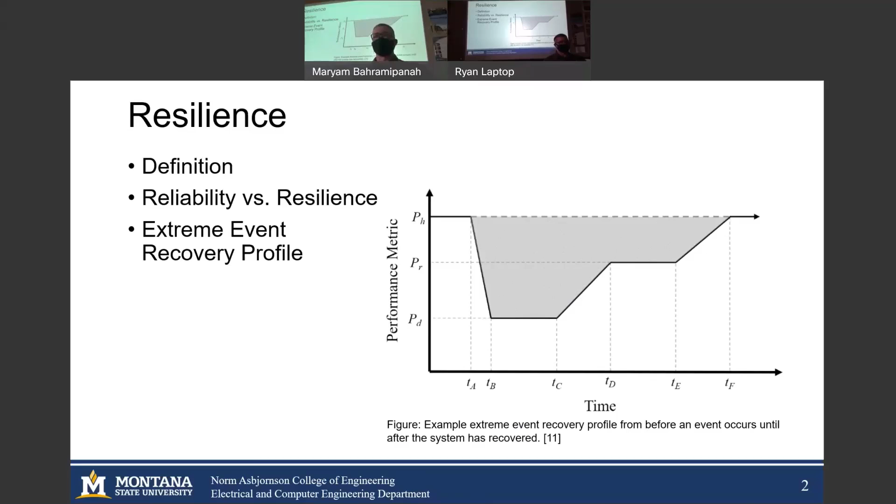As I go through my presentation, keep in mind this image, which is a profile of an extreme event: going from before the extreme event occurs, where the system operates at a healthy performance level; after the extreme event occurs, the system degrades down to a degraded performance level before recovering over time back to healthy performance, after resources available to the recovery process have been assessed and a strategy has been developed.

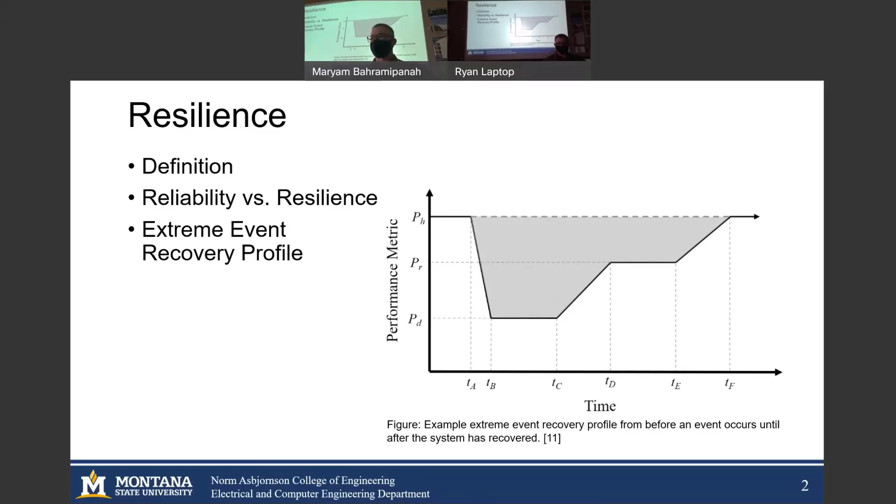The motivations behind this research are mostly based on the increased frequency and severity of extreme events that have occurred in recent years. Main ones that come to mind, as I'm sure we all remember, are the polar vortex, which caused extreme load curtailment this past winter over in Texas, wildfires in California that have happened almost annually for the past 5 years, as well as hurricanes across the eastern US that occur almost annually as well.

The research gap this is trying to fill is developing a probabilistic approach to extreme event system degradation, where many works otherwise assume that a level of system degradation has occurred before evaluating a system's recovery and the performance during that recovery. It's also trying to develop a generalization of equipment impact techniques for any extreme event.

Other works tend to perform single, highly focused event simulations or analysis on only a single type of component during an extreme event and the recovery process, versus this, which is trying to generalize the impact of various types of equipment to an arbitrary extreme event.

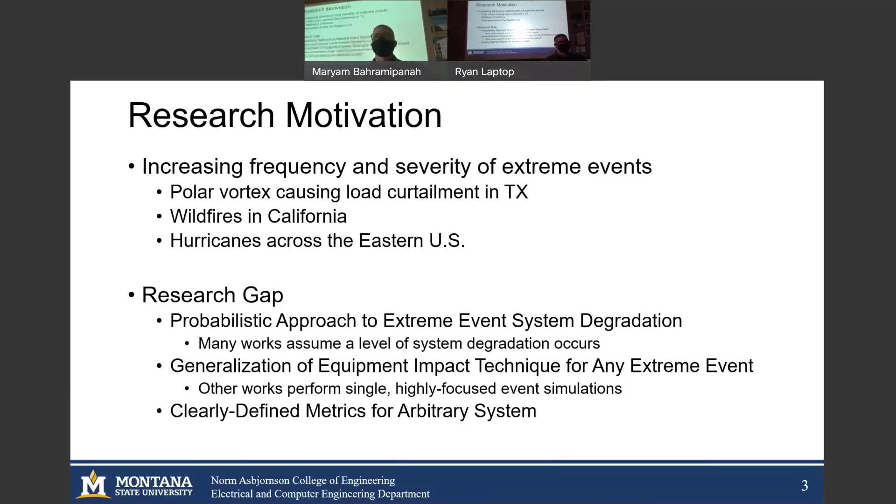And third, defining clear metrics for an arbitrary system for evaluating a power system's resilience in its recovery process, both immediately following and until the entire system recovers from an extreme event.

The objectives here are developing a simulation technique for active distribution networks, the extreme event impacts, and the system recovery, with a proposed resilience metric being discussed and used for evaluating the system recovery.

The first part in this process was developing a regional geography onto which a power system, specified in the paper, could be overlaid and laid out to have an extreme event occur on it.

The process by which this is done uses a map of random values, which are then blurred using a Gaussian algorithm until a relatively smooth terrain has been developed.

The benefits of this are, first of all, it's an arbitrary system and an arbitrary geography that incorporates high and low areas of elevation, but this system could be extended to standard geographic information survey maps that provide topography if you're looking at a real system laid out on actual terrain.

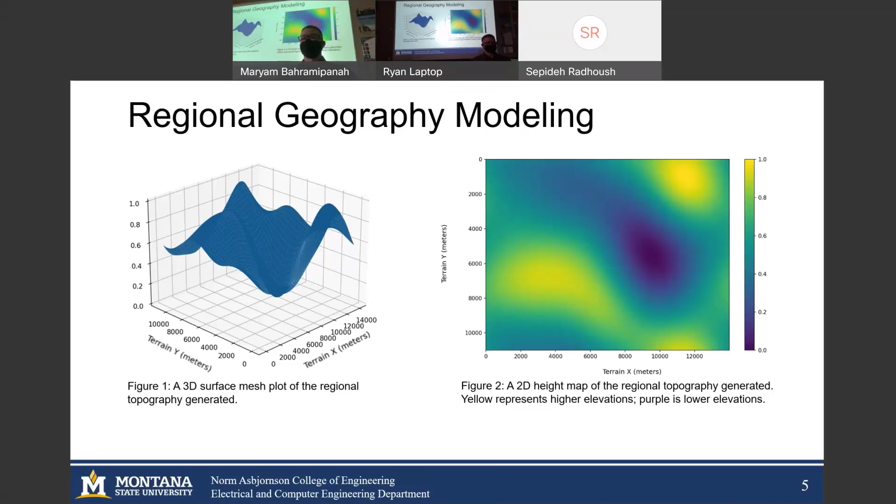For extreme event simulation, the process takes three parameters: the event type, the local severity for that event, and the regional topography, which was just discussed. The output is an impact severity map, with values ranging between 0 and 1 in a normalized fashion, representing the probability of an extreme event impacting that region.

The event type could be anything from a hurricane or tornado to a flood or windstorm, etc. -- some sort of regional disaster that could impact a topography. The local severity parameter is a value between 0 and 10, as an integer, which represents an aspect of the local terrain relating to how severe that event is.

Several examples of that will be discussed here in the following slides. The regional topography, again what was just described, could be a real topography or an arbitrary one, which is the case for this simulation.

The four types of extreme events which were modeled in this work are floods, tornadoes, windstorms, and wildfires. The flood is going to be the event focused on primarily when portraying the results here, considering the impact region for a flood is much more significant, as you'll see in the following slides.

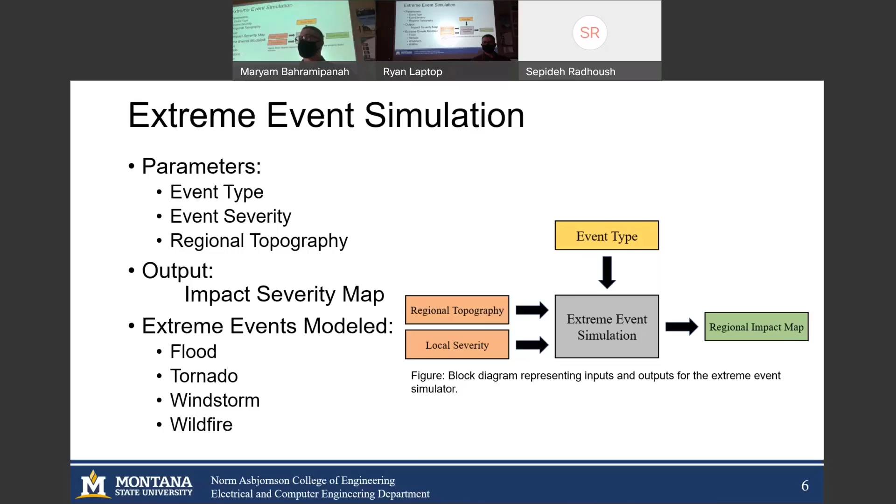For a flood, in determining how severity generates an impact probability map, the severity parameter from 0 to 10 defines how high the water level rises in relation to the elevation profile of the region. A severity of 0 means there's no water coverage in the region, while a severity of 10 means the water covers all of the land in the region.

That water level then goes into an impact generation function, which uses a logistic function for smoothing and additional aspects. It takes the height of the topography and the water level and evaluates that in the logistic function in order to approximate additional impacts above the water level, such as soil destabilization for equipment foundations or weakening of the terrain because of how high the water level reaches during the event.

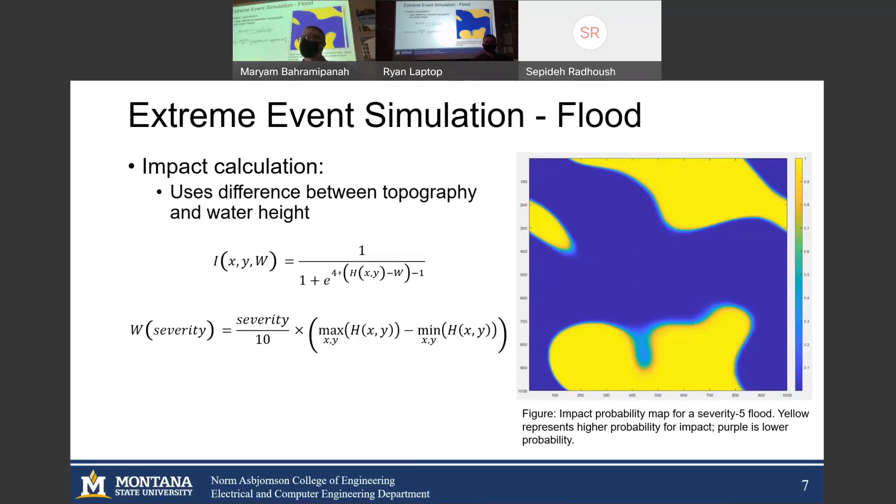As a side note, throughout all of these impact maps, yellow regions are areas of high impact probability, and purple or blue areas are regions of low impact probability. That'll be true across all of these maps.

For a tornado, it's based on the assumption that tornadoes tend to move uphill and also includes a random acceleration aspect, such that at every time step in the simulation, a Gaussian weight matrix, whose sum of all values equals 1, is centered at the tornado's location. The width and height of that Gaussian matrix is based on the severity of that tornado event.

For each time step, the tornado is moved according to an acceleration based on the terrain as well as random noise. At each time step, that weight matrix is additively applied to the impact probability map to assess the impact probability along the path of the tornado. So the longer a tornado stays in one place, the brighter the impact probability will be; the faster it moves across a specific area, the lower that impact probability will be.

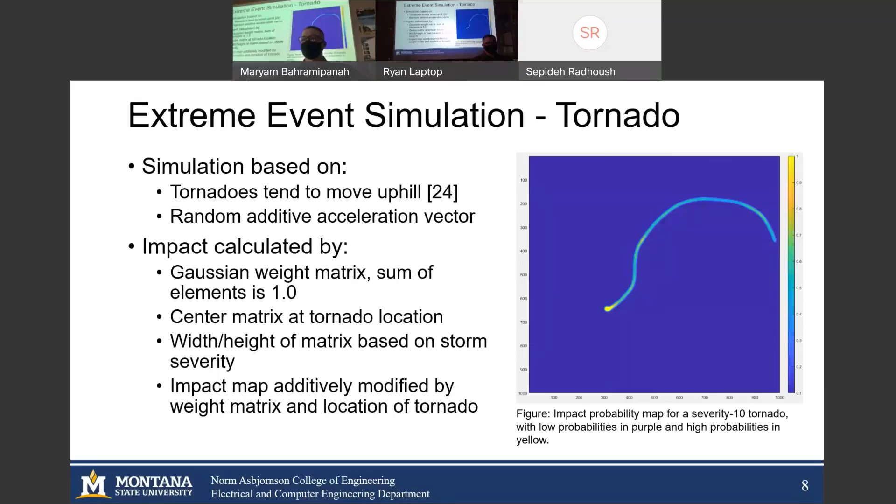For a windstorm, the simulation is based on a ray tracing method, where a random vector along 360 degrees is determined for the source of the wind, and straight lines are traced across the topography, evaluating where each point along the line increases or decreases in height. For every increase in height, a 2% impact probability of the elevation change is assessed. For every decrease in elevation, a 1% decrease in impact probability is assessed.

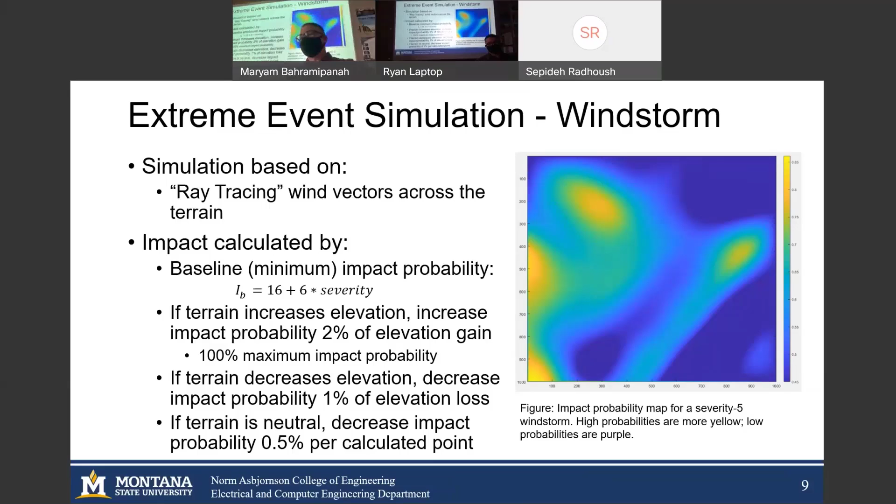Finally, wildfire—this was the most complex of the simulated extreme events. The severity parameter here dictates the number of initial fires, the lifetime of each fire, the probabilities of uphill, downhill, and indirect spread of the fire, the maximum number of fires allowed for reasonable simulation performance, and the radius of indirect fire spread. The assumptions made were that fire spreads uphill easier than downhill, and that fire can spread indirectly via embers flying through the air.

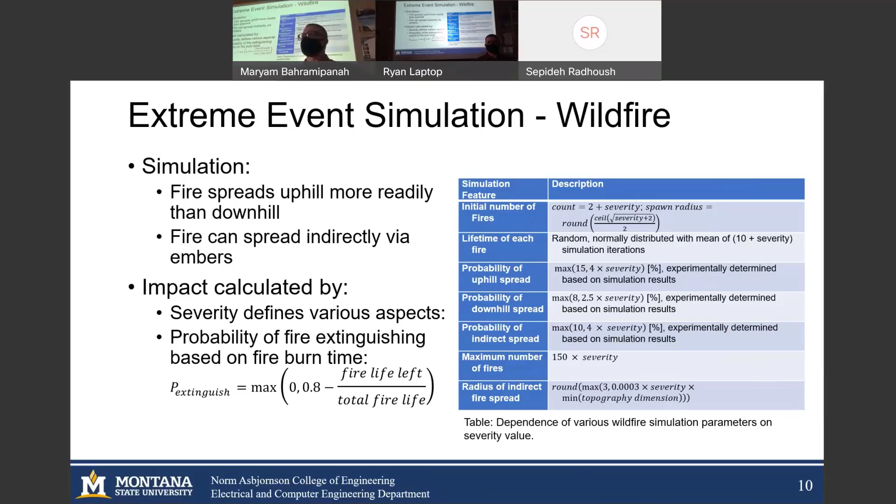An example of the wildfire impact can be seen here, where the brightest point in this web-looking pattern in the middle of the image is where the fire originates from, and the fire spreads outward in a more or less random pattern that's also determined by the terrain of that region.

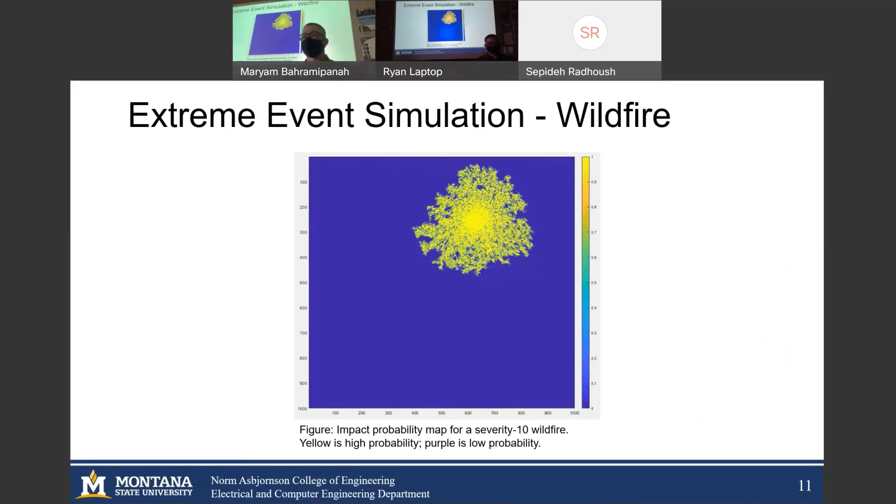Finally, getting into modeling the test system, the system used here is based on one of the resources, which is a test system specification. This test system specifies a 4-microgrid, multi-microgrid system in which each of the microgrids can be islanded from one another and operated adequately, or can be connected between each of the microgrids for a peer support mode, or otherwise connected to the bulk power grid in a grid-connected mode.

Each of these microgrids includes distributed energy resources in the form of battery energy storage systems, photovoltaic systems, wind turbines, and synchronous generators.

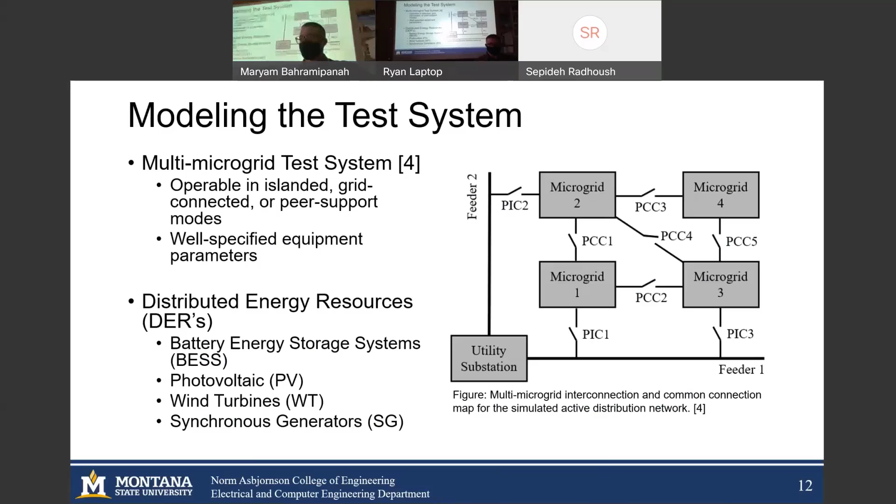This is a one-line diagram specified in the test system paper, and it lays out each of the locations of the distributed energy resources, and also shows which buses within each microgrid are connected between each of the microgrids and to the utility grid.

Overall, this system includes 41 buses, 52 lines, 15 PVs, 4 wind turbines, and 4 synchronous generators, where those synchronous generators can be used to support each of the individual microgrids they're connected to without the help of any other energy resource on that grid. The peak load for this entire system is 30.8 megawatts.

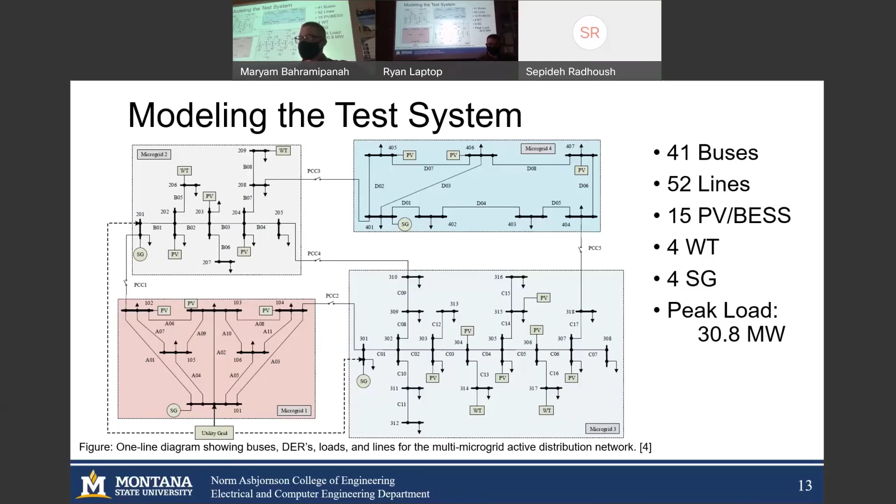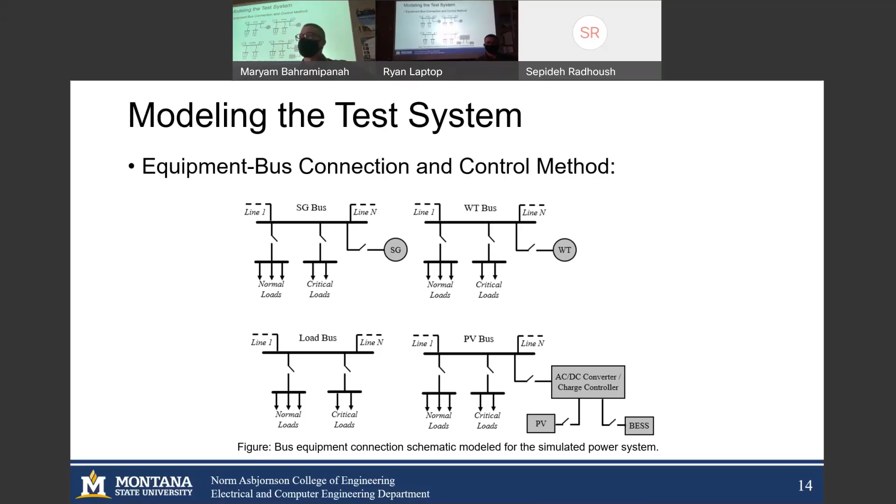For each of the equipment connected to the buses, these are the connection diagrams for how that is modeled. The original paper dictates having transformers where each of the switches are in this schematic. However, due to simplicity of modeling, transformers were replaced with simple switches, so you can either define the loads on those buses or the equipment on those buses as connected or disconnected.

Laying out the one-line diagram, which was shown previously, in a geographic fashion, relative to the utility grid, which is placed at the origin in this image. This is the map that's produced.

Within this map, each of the microgrids is highlighted for its area of responsibility, just to identify which buses belong to which microgrid a little bit easier. In order to overlay this onto the regional topography, it's just a matter of scaling and translating this according to the size of topography which is requested. For this project, the scale is a 1-to-1 ratio, so a 1 coordinate change represents a 1 meter change in physical dimensions.

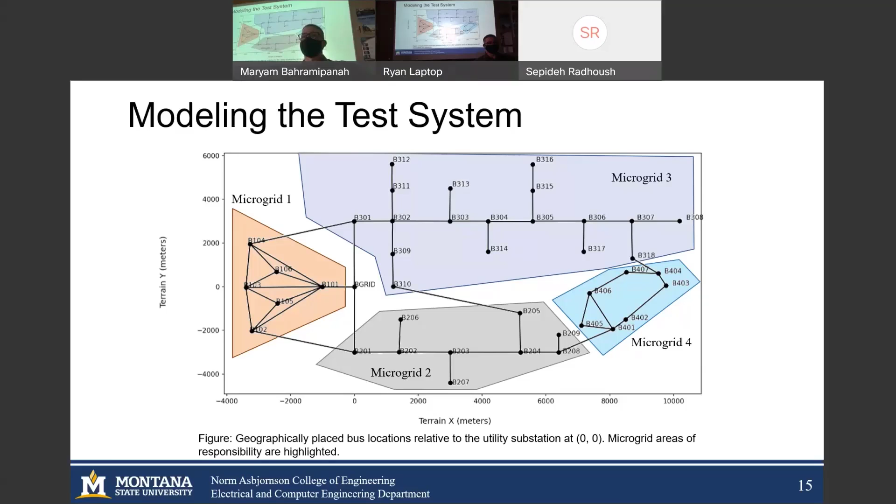Now that we have a system and we have extreme events, the system degradation per the extreme events can be calculated. This is done using the equipment reliability, which takes into account the equipment's time in service, the equipment's location X and Y on the regional topography, and the equipment type in question, whether it's a bus, an overhead line, an underground line, load, synchronous generator, etc.

It also uses the impact probability of failure given the type of equipment according to the type of extreme event that's simulated. So for buses and overhead lines, the damage those will incur is directly related to how high the water level is in relation to the conductors that sit above the water surface, and whether it might be impacted or contacted by debris or other aspects such as that.

Finally, the impact probability map generated by the extreme event simulation comes into play here by looking at the individual coordinate X and Y and the probability of impact from 0 to 1 taken from that map.

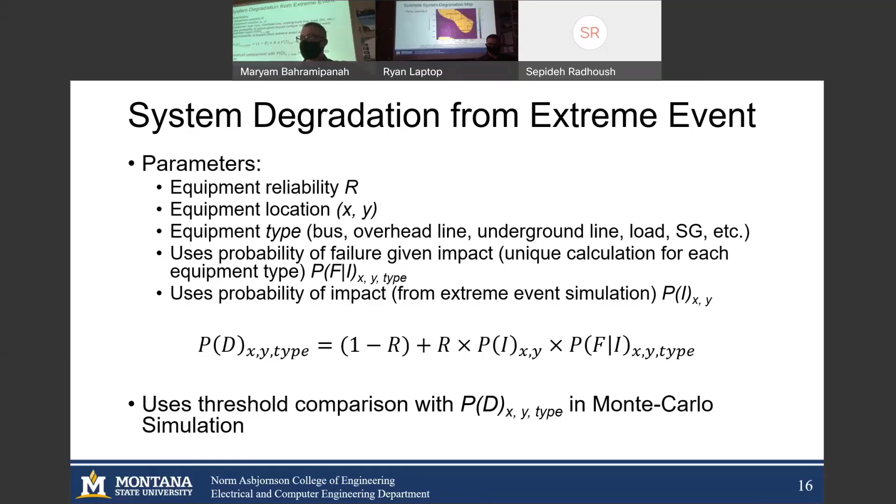This is an example of the most likely system degradation according to a level 5 severity flood. Within this map, the green equipment represents equipment that's operating normally. Red equipment is that which has failed, and black equipment is disconnected from other equipment due to failure or otherwise identification that it should be out of service.

For the purpose of the simulation, equipment is only disconnected if a piece of equipment that it connects to has otherwise failed, so all equipment should normally be operating normally. As you'd expect, areas of high impact probability have failed equipment much more, reflecting the impact of the extreme event.

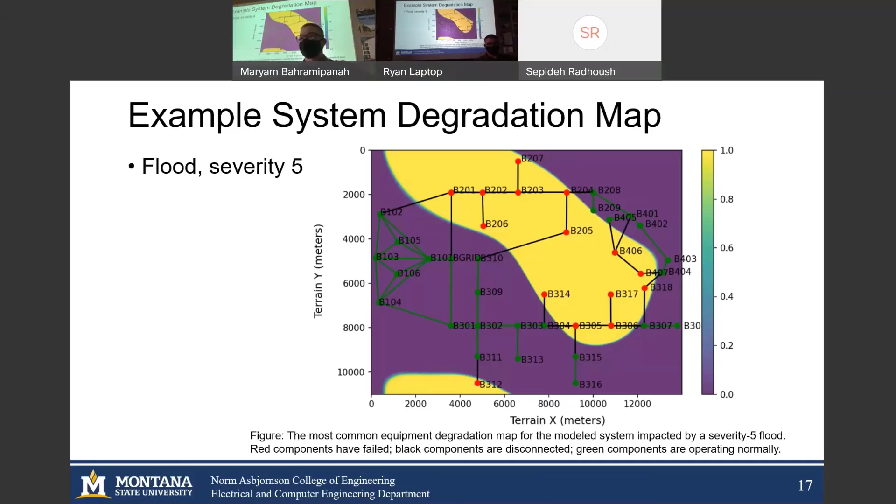In order to perform the recovery simulation, these are the general steps performed. First, the system is loaded in from the configuration specified in the test system specification. The simulation is built according to user-defined configuration parameters such as the extreme event type, extreme event severity, repair strategy, number of repair crews available, and energy storage management strategy.

After impacting the system and degrading the equipment, recovery operations can be performed, which log the simulation results and save the output for calculating resilience metrics after the simulation.

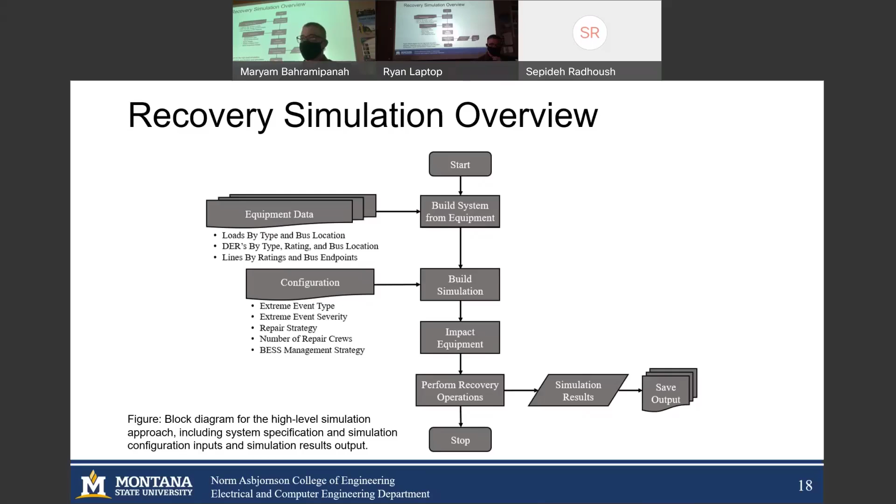The loop of the recovery itself goes through these stages. First, it calculates what islands exist within this power system, then looks at available generation resources and required loads that exist in those islands to calculate the curtailment of loads within those islands.

If the island includes energy storage systems, the energy storage system availability, the amount of power it can supply to the grid for that island, is determined at this stage as well, where the battery will attempt to provide as much power as it can if it has the charge available, given a shortage of generation relative to load on that island.

After incrementing the simulation time, all equipment that's normally operating and in service has a chance of failing with an in-service failure due to its own reliability and time in service. That'll be discussed on the next slide.

The energy storage system state of charge is then updated to reflect how much it was set to charge or discharge, at the rate at which it was charging or discharging according to the curtailment strategy.

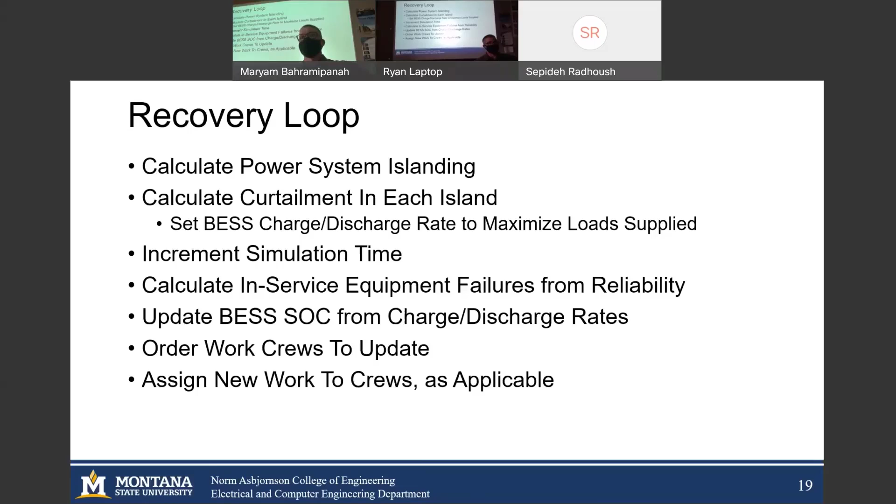Work crews who are already repairing equipment are told to work for 1 hour, and those who complete those tasks within that time frame are then assigned new tasks for repairing new equipment after that.

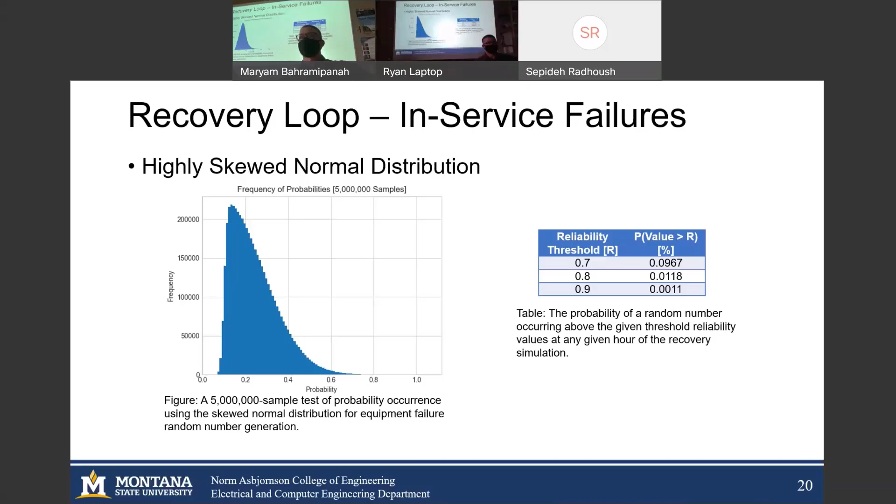For in-service failures, the probability distribution is based on a highly skewed normal distribution, where reliability thresholds of 70%, 80%, and 90% have the given probabilities of impact shown in the table on the right. The idea is that for each time step in the simulation, a piece of equipment has these probabilities of failure,

which would extend the repair time for the simulation. This introduces randomness into the recovery simulation, which is part of the reason Monte Carlo simulation is required for analyzing the results here.

There are 3 aspects which remain constant across any simulation: the regional topography, which is generated, the extreme event impact probability map, and the equipment initial operating times. Beyond that, aspects such as repair crew skill, energy storage state of charge initially before the extreme event occurred, system degradation threshold, and initial hour of the year that event concludes and recovery begins, as well as random in-service failures during recovery, are all random.

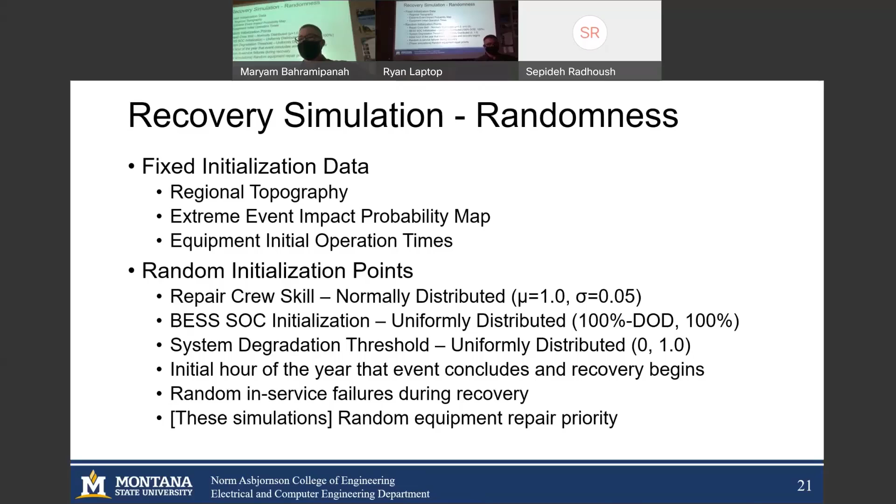Additionally, one final aspect for the simulations is the selection of repair priorities. In the simulations discussed here, this process is a blind pick, where equipment is just chosen randomly without any particular strategy of trying to repair specific buses or restore loads or anything along those lines. So this is an additional aspect of randomness that comes in.

The resilience metrics proposed here are, I have 7, and several of these can be split to analyze critical loads versus all loads, and I'll mention those here.

But first of all is system recovery time, which is simply the amount of time it takes from when the extreme event occurs until all equipment is repaired and back to normal operating state.

Second piece is equipment impact percentage, which takes the ratio of number of impacted pieces of equipment to total number of equipment in the system.

Equipment degradation recovery rate is the ratio of equipment impact percentage to system recovery time, and this evaluates a percentage per hour that a system is expected to recover at. This is going to be based heavily on the amount of resources available to a recovery process.

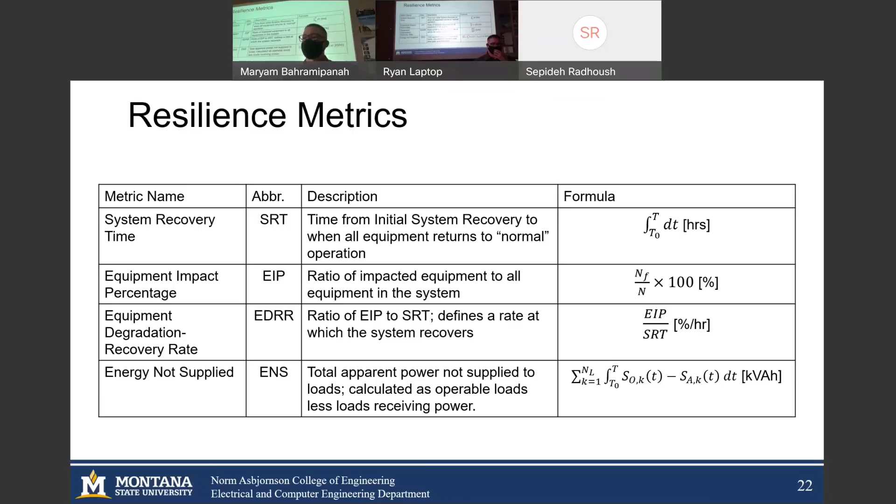Energy not supplied, this can be split up for critical and non-critical, and this represents the total amount of energy throughout the entire recovery process which is not delivered to loads. So integrating the amount of power not delivered over the entire recovery duration.

Average power not supplied then takes that energy not supplied and divides it by the system recovery time to give you what the average power not delivered to the system loads is. Again, this can be divided into critical versus all loads.

Energy supplied ratio gives a ratio of how much energy was delivered to equipment versus the amount of energy requested, amount of energy delivered to loads versus energy requested by loads. Again, critical versus all equipment here.

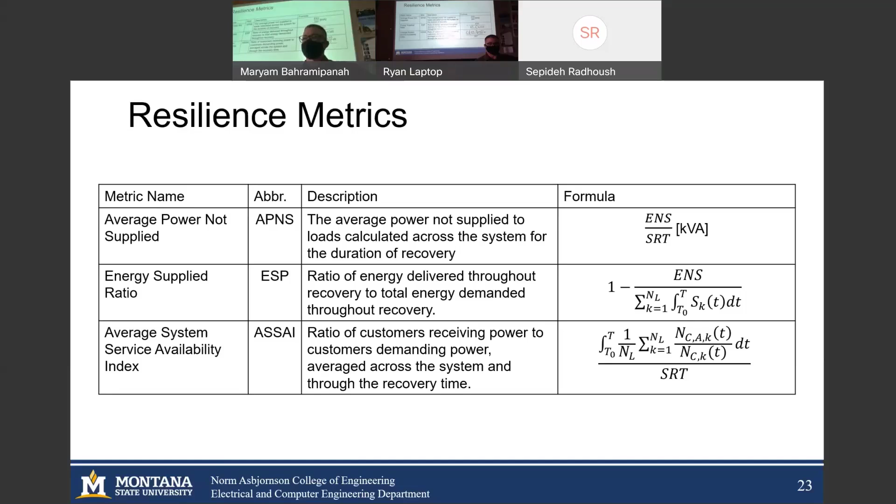And average system service availability index, which is based off of the reliability index of a similar name, looks at the number of customers receiving power versus total number of customers across the entire system and throughout the entire recovery time, averaged.

So, simulation results here. As I mentioned a couple times before, the simulations were performed using Monte Carlo, and the states of each piece of equipment is logged for every hour of the recovery process.

Those equipment states are then used to calculate the resilience metrics which were just discussed. And for all of the simulations performed through Monte Carlo, a histogram plot of each of those values is displayed to identify what trends exist throughout the random simulation process.

And because of the shape of the results process here, and I'll show you an example in the next slide, the median value of these results is chosen due to outlier values, which pull the mean value for the metrics off of the most likely

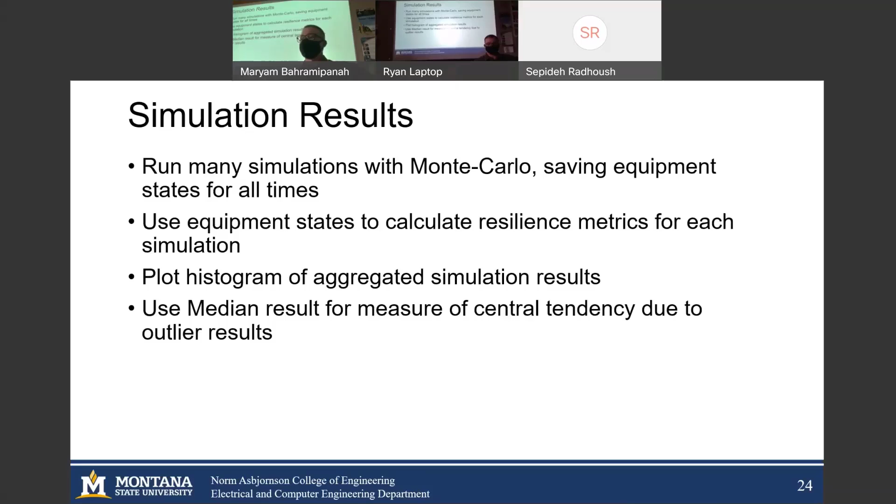recovery times or indices. So as an example of some of these resilience results here, system recovery time for a single repair crew, blind pick repair strategy, preferential full energy storage system management strategy, and level 5 flood is shown here at the right.

As you can see, the number of outlier recovery times that exist for this configuration skews very high into the thousands of repair hours, and therefore the green line that you can see on this plot lies right on the most likely repair time region. That's what's taken as the measure of central tendency for the metric.

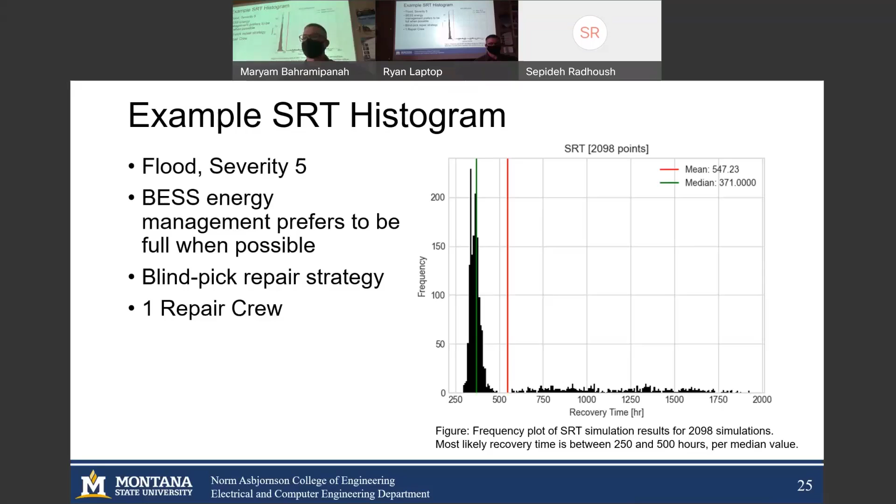In addition to individual metrics, a trend analysis was performed based on varying the number of repair crews that can concurrently repair equipment throughout the recovery process. This is done by holding all other configuration parameters constant and just varying that one aspect. These trends aren't unexpected, because with more resources available for repairing a system, each individual resilience metric should improve to its nominal value.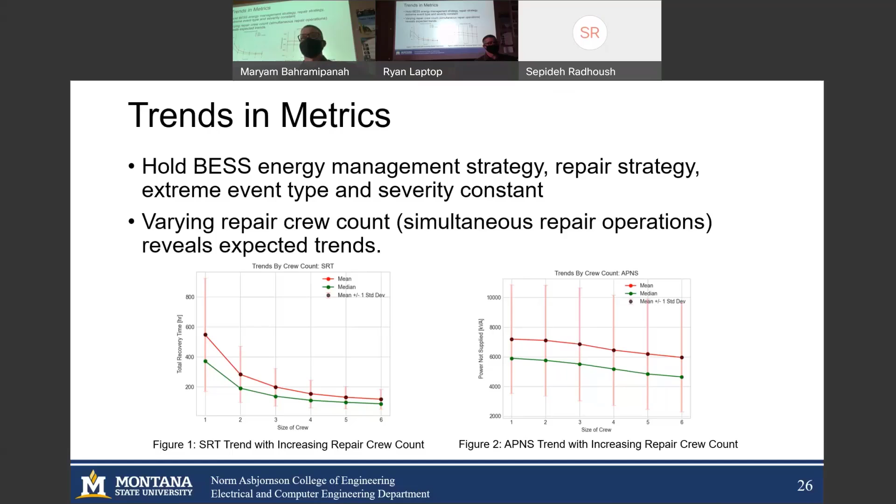The average power not supplied, as you'd expect, with faster recovery time and more resources put toward recovery, will decrease. The energy supplied ratio increases as you get more resources online and more loads reconnected to be supplied with power.

And the average system service availability index increases as the number of loads reconnected in a more rapid fashion increases and the number of customers supplied by those loads increases. So these trends are not unexpected by any means.

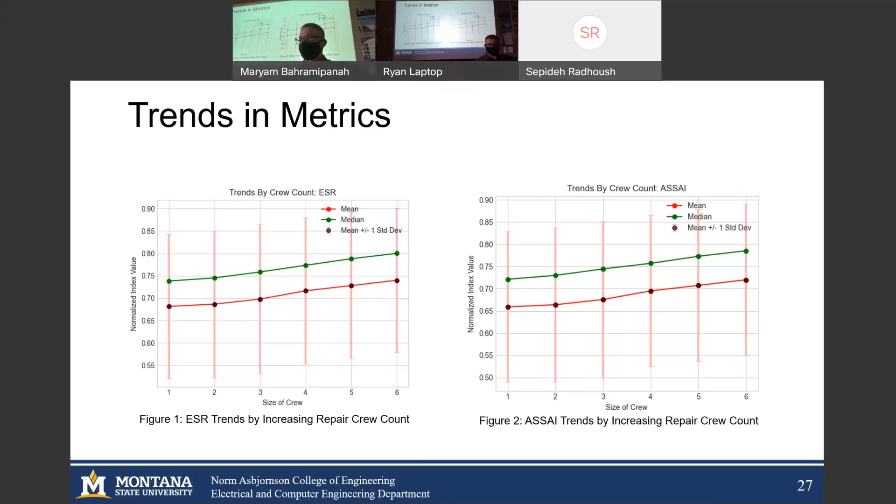So the conclusion of this work: the primary objectives have been adequately completed. A model and simulation of an active distribution network has been produced. Simulations of extreme event impacts and probabilities of impact have been performed. Resilience metrics have been proposed, and those metrics have been used to evaluate simulated system recoveries for a wide range of random aspects that occur within those simulations.

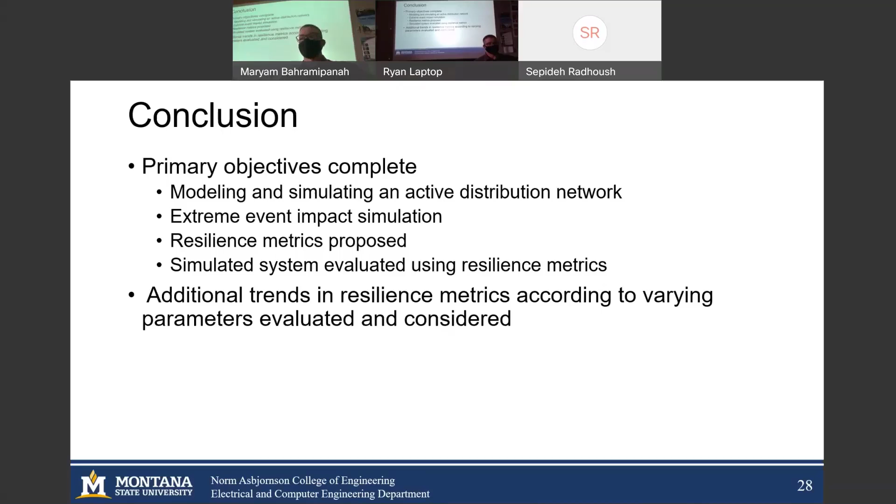Additionally, a trend for modifying a single parameter of the recovery process has been analyzed. Future works that can spur off of this include incorporating power flow analysis into the recovery simulation, where you look at possible overloading of lines where the line is undersized for delivering the amount of power requested.

Evaluating additional resilience metrics, perhaps based on an economic analysis of the incremental change in a specific metric's value versus the cost increase for achieving that increased resilience.

A strategy optimization could be performed here as well, where you look at what the best battery energy management strategy is, whether you continue to supply critical loads instead of trying to maximize the number of loads supplied, or otherwise improving the repair prioritization strategy. For example, if a single piece of equipment has failed between two islands and you want to reconnect islands fast, or if your priority is recovering generation, or reconnecting loads, those different repair strategies could be evaluated.

For increases in resilience metrics, economics of supplying loads, so economic dispatch of energy, could be evaluated as well if that information was available. Or otherwise, generalizing this simulation process for any arbitrary system specification passed into it, using an automatic geographic bus layout generator, could also be performed. But those are works for a future iteration of this work.

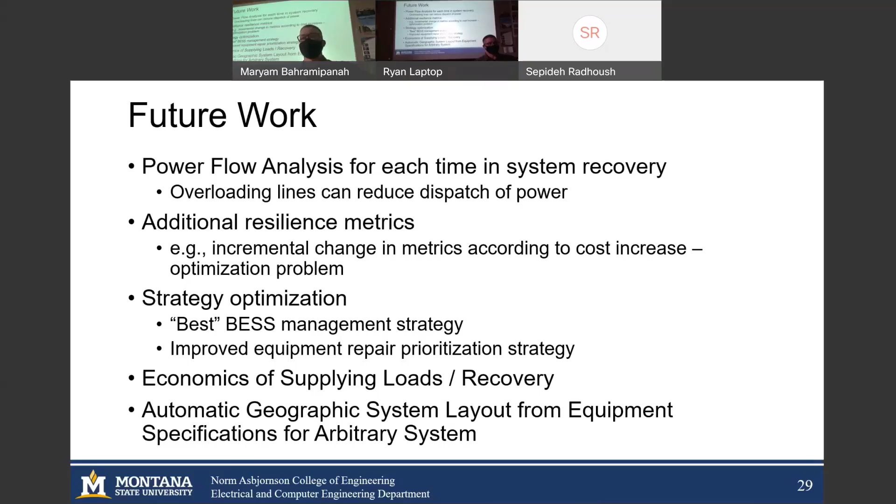So that concludes my presentation here, and I'll accept any questions that anybody might have at this point.

Do we have anyone online? Pass this back to you. Okay, yes, we have just... Okay, just one. Questions from our online attendees or in person?

So when you chose the layout, did you pick one topography for the layout that you had, or did you use multiple topographies? My thought is that windmills tend to perhaps perform better higher up. Was that type of thing considered in your simulations?

It wasn't. The layout of the buses on the geography was strictly taken to make sure the buses fit within the generated region. Any incorporation of elevation profile of the terrain with where the buses are placed was not taken into account.